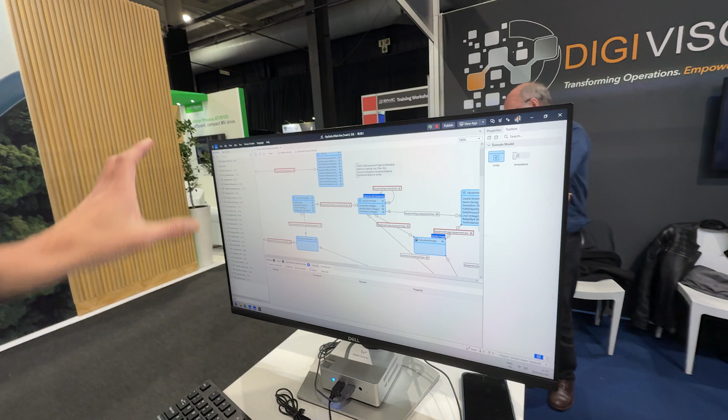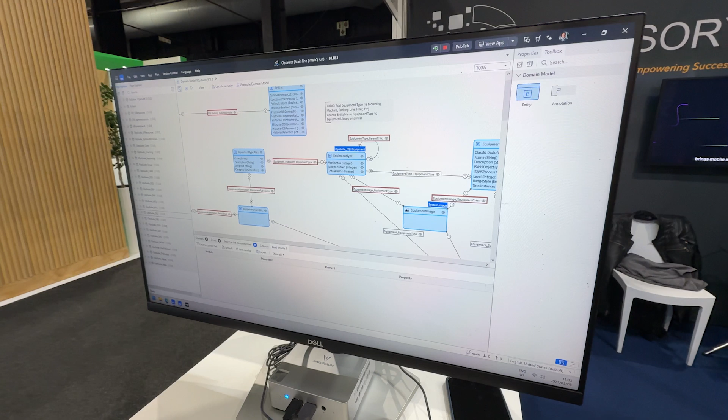So if you look at the IDE, this is like the IDE of Mendix. So you've got your data modeling, and you've got different modules you can develop. So you can see we've developed modules specifically to cover MES capabilities. So we've got equipment management, detail scheduling, OEE, quality management, shift calendar, work order management, and then the coding basically is in terms of visual flows, right?

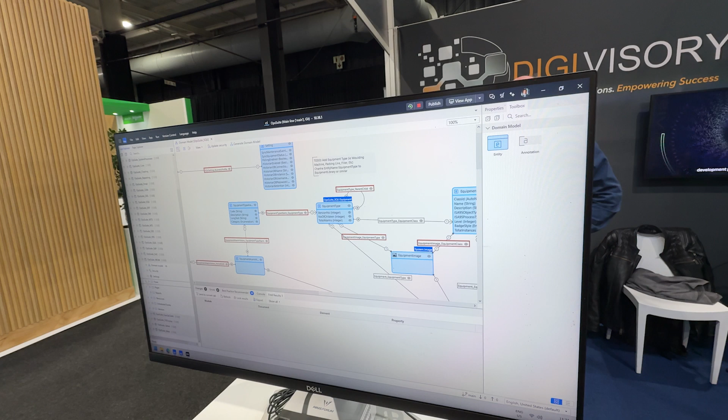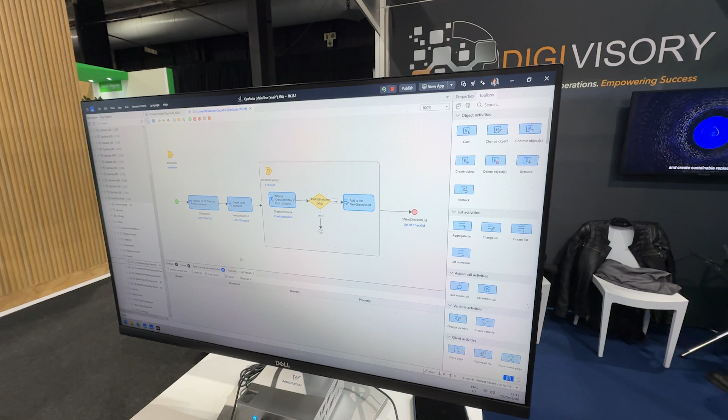So let's look at a flow, right? So you would typically have objects on the right hand side, you'll drag and drop, and you'll create your business logic using visualization. So here I'll retrieve some information from the database, I'll create a list, loop through some things, do the decisions, and have an output. And you use this as your logic.

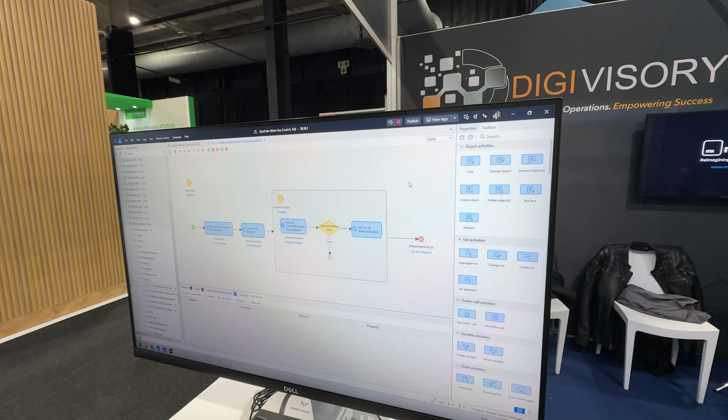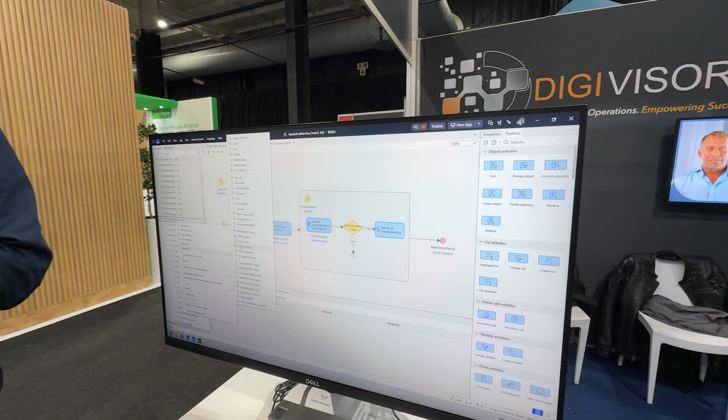Yeah, you don't actually touch any coding. However, if you really do want to get to the coding level, you can actually go and add JavaScript or Java actions, or do your own coding. You can basically build custom functions that you pull into a sequence, basically. Absolutely, and you expose it as an object and you pull it into your flow and you use it that way.

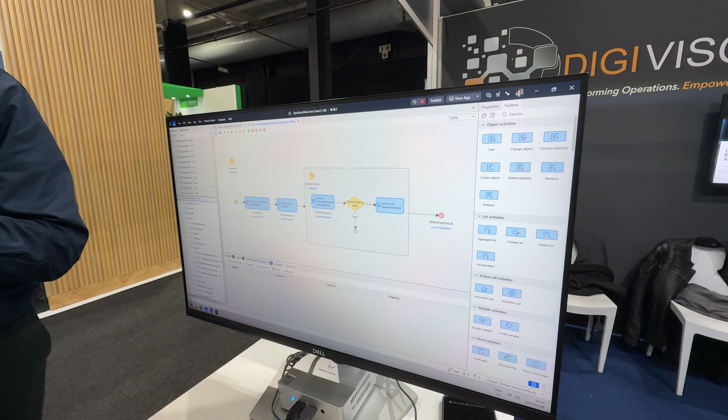So this is the idea. So if I show you what we've done in terms of the application on MES level, we've just I'm just going to log out quickly. We've used a pet food as an example.

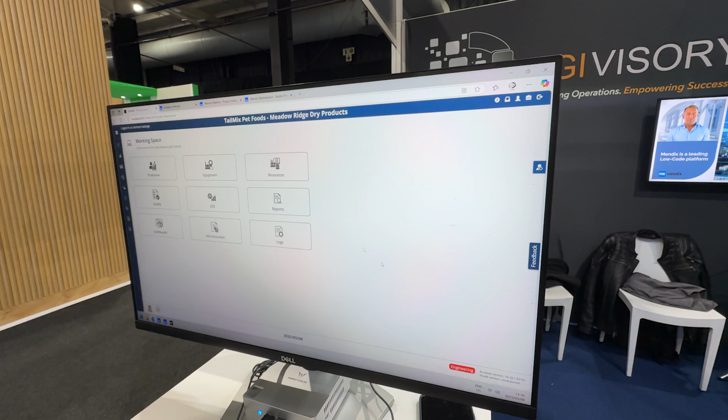We can actually configure it for multiple sites in that industry. So it sort of contextualizes against one site. If you look at your production orders, let me go actually to your equipment model. The equipment plant model is based on ISA 95 structure, where you've got your enterprise, site, area, and your machines, and each packing line. Each packing line has got machines within that.

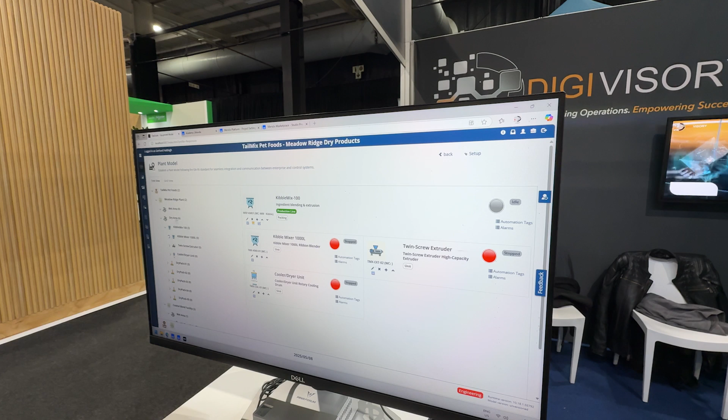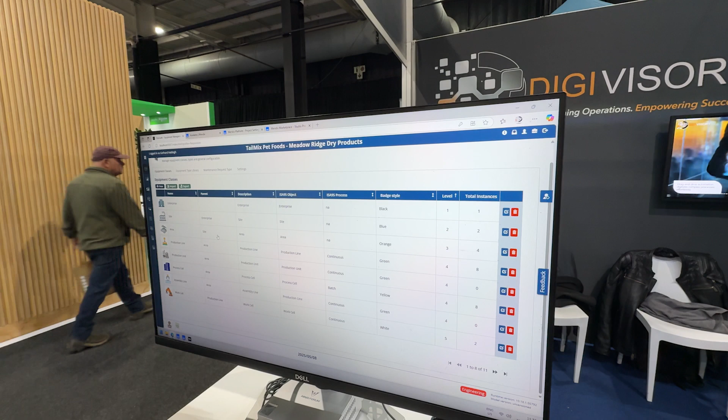So you set up your entire structure this way, and in terms of the setup, we've got your ISA 95 objects as a standard. You could obviously create your own library objects and use that as a template to create your plant model. Once you've got that done, you link that to an ERP work center.

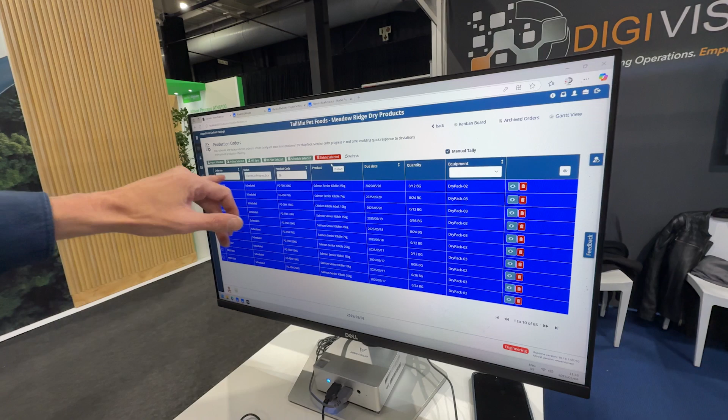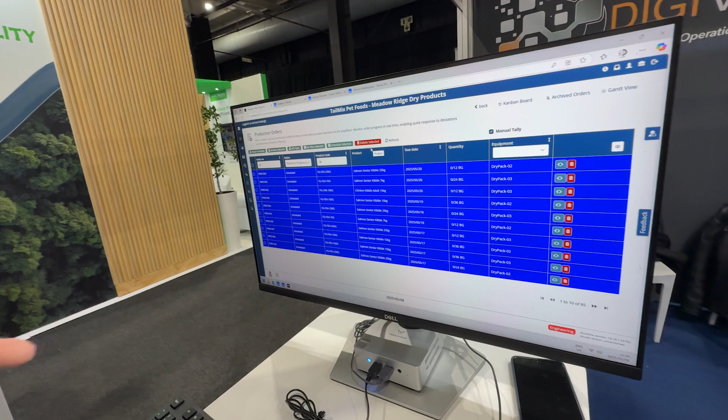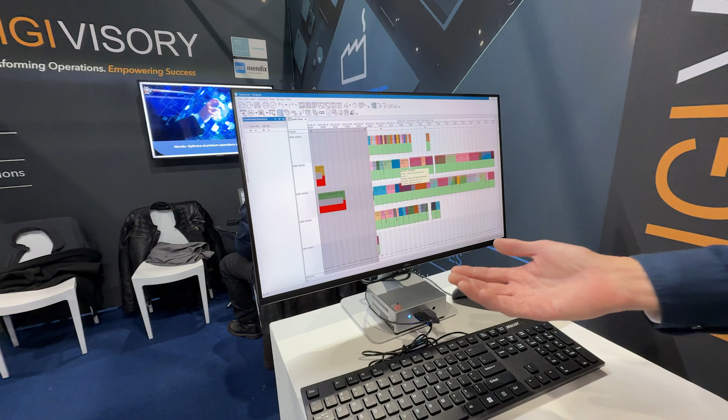So on this side here, this is the scheduling software. Once it's planned, it gets imported here. The planner will go look at your resources and throw the orders on the scheduling board. He can move the orders around as he likes, or run a predefined rule which would look at minimizing setup time, or eliminating material shortages, using due date as a constraint, that type of thing.

Okay, once he's happy, he releases it. This is not Mendix though, right? This is not Mendix - we're using this as a complementary product on Mendix for scheduling purposes.

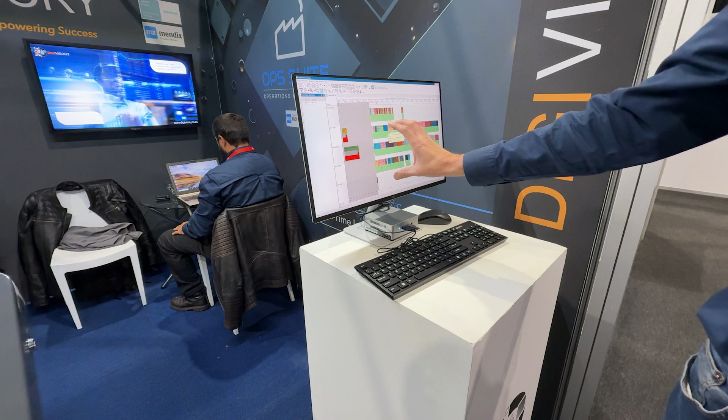So this is what the guys on the floor would see, basically. This is the schedule that the planner would see. But when the planner is done with that, he will release it again, it goes back to Mendix, and it becomes a scheduled order.

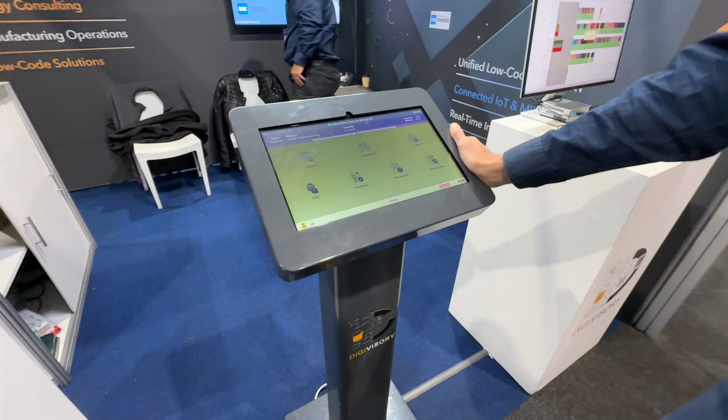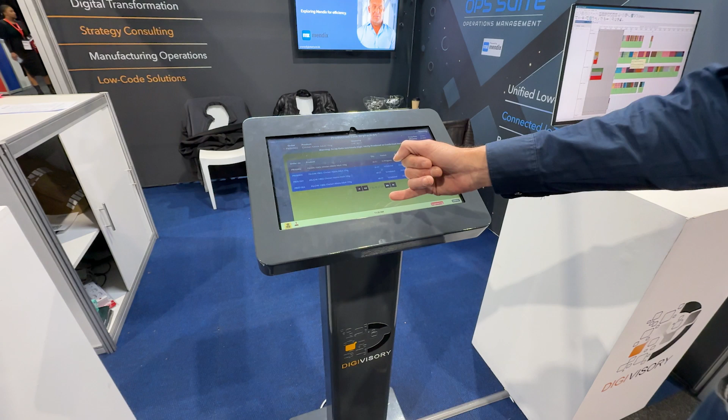So then it becomes available here, right? This is your typical interface at the line itself. We've got the kiosk, we've got a tablet running here, we've got order lists. Based on this production line, these are the orders that need to be executed for that shift. You can see the first one is running already. The operator can go and look at the BOM, the bill of materials.

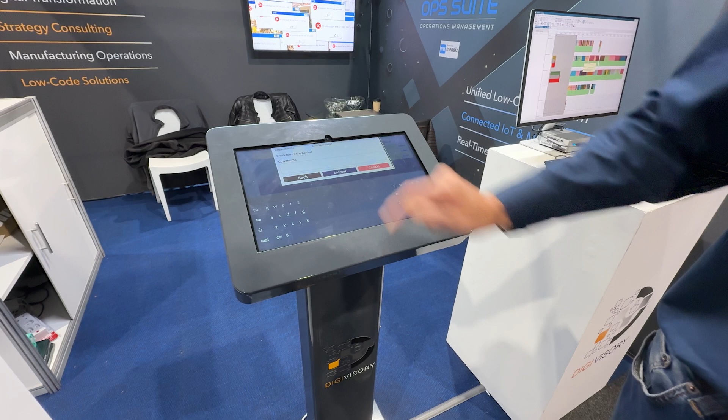He can reprioritize an order if he wants to, change the priority, and it will go through a workflow process where someone needs to approve it. Once it's approved, it will be available for execution. They'll go and start the order, go through some pre-startup checks. By the way, the checklists are all configurable in the system - you can define your own checklist. They'll go through some checks.

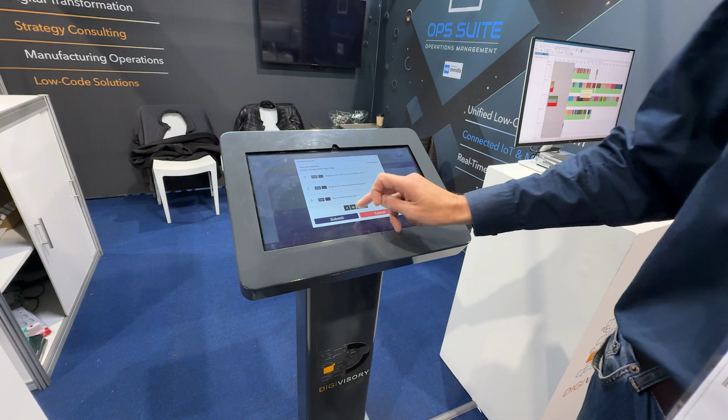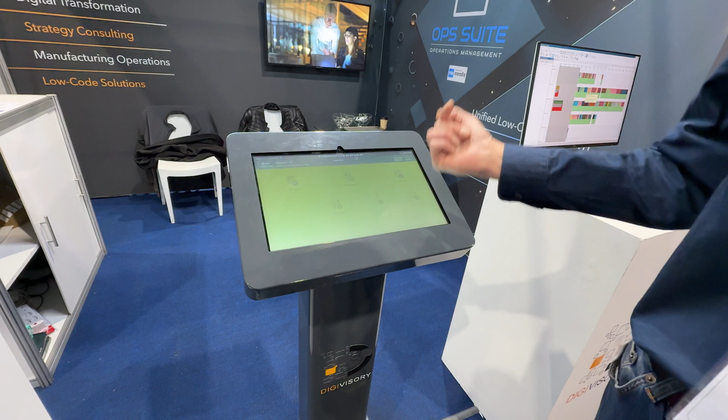If you just do this, and then submit it. Once it's submitted, the system will signal back to the automation layer, start the machine, it will go into running status, and all clear is running.

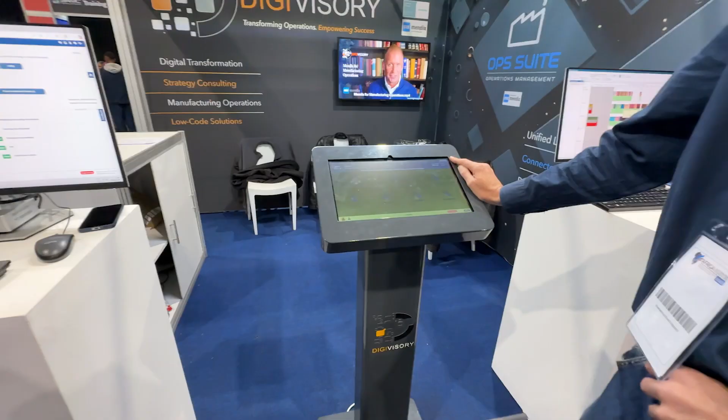And all of this, except for the planning module, is done in this Mendix? All Mendix, so everything is visual, as I said. We actually implemented a solution like this in a matter of 7 months from start to finish, containing the basic MES capabilities.

And typically it would take? Years. And you'd be wrong, and you'd have to be adjusting, so this gives you the flexibility to keep iterating it. It's really, really - I remember you spoke last year and I thought it's a new way of thinking. It's quite disrupting, I believe.

The problem is you need to go to market fast, and you need to be competitive. You need to bring out your product faster to the market. So we want to help customers battling with that, eliminating the long periods of executing projects, getting to value as quickly as possible, and also giving them the ability to do it themselves.

So we help them and give them a kickstart with a template, or what we call an accelerator module. Then they can take that and extend it further by getting the necessary training to do that. All the training is free online - you can do all your learning paths for free. You can learn Mendix and quite easily help yourself.

How does the pricing model for Mendix work? It's a platform, subscription-based model, annual subscription on the platform itself. You get different levels of the platform - small, medium, large, extra large, and so forth. Then you license per user, which is basically an interface or a login. Each license is a physical person that needs to use the system. There's no licensing based on a number of machines or equipment, that type of thing.